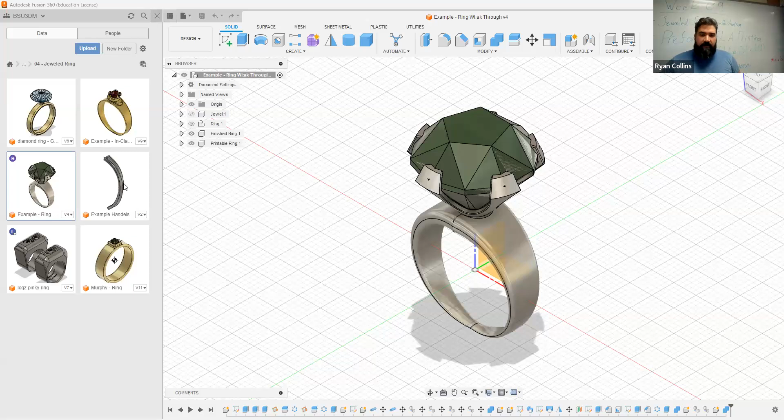All right, so let's figure out how to use an SLA printer, or our Formlabs printers. So first, let's hop over to Fusion, and I've got my model out. So got the finished ring, all of that stuff. And remember, while the requirement for the assignment was two separate objects, you do want to actually join these together, so it's a singular entity, a single object.

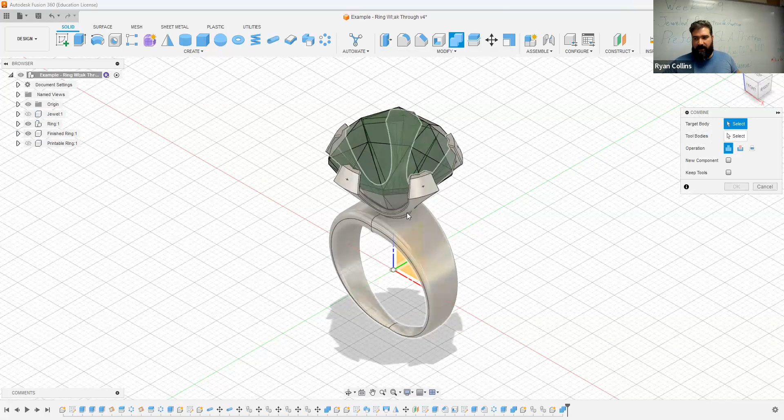So all that would mean is go to your combine tool, select one, select the other, complete that. I'm not going to do that right here because I have a different model already set. So I'm going to cancel that and just go over to the one that is already printed. So they're both sharing the same color because they're the same thing. I open the drop down, it's one solid thing. So there we go. Same deal.

You can go to export, but I prefer using 3D print. It seems to convert faster. Go to 3D print, disable utility, although you can actually use PreForm directly out of this. So you can actually go directly out. But just for the sake of consistency, I'm going to disable that, and we're going to print it just as is.

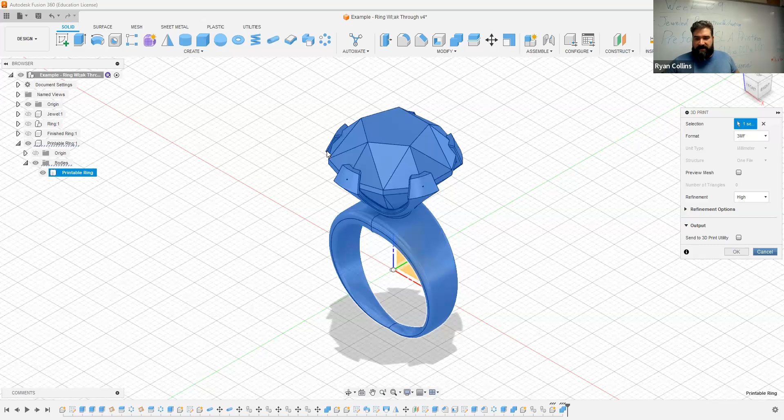So if you want, because this is a smaller thing, if you have higher detail, you might want to check the refinement and go higher. Go to high refinement if you would like. It's up to you. It's not really going to affect too much, but if you have a high detail thing, you want to make sure you're using high detail. So just save. Yep, that's fine. Saving on the computer, downloads. Okay, great. So now let me hop over to PreForm.

So this is the interface for Formlabs. It's very similar to most all of them. You can also use Cura, which is the Ultimaker Cura platform. It also supports Formlabs, but just know that there are some differences in the interface itself.

Now, first thing, well, let me bring the model in. Where is it? Drop in a model. Come on. No. Good God. There it is. So you just bring your model in, drag and drop, and you're good to go. Except, there we go.

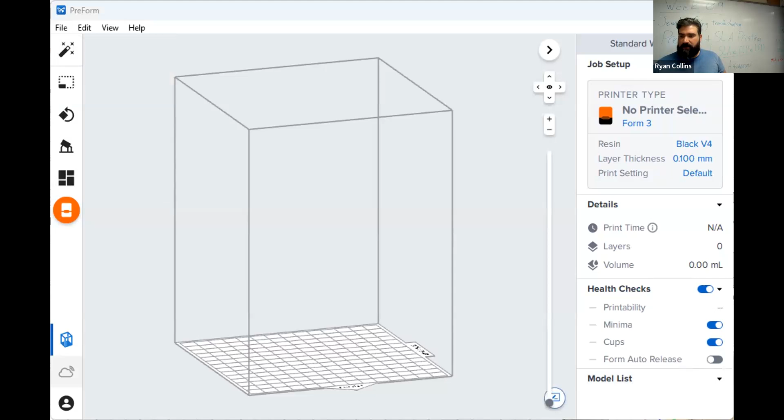Now, immediately you're going to get some errors like, oh, your model needs more support. Yeah, of course, because it's just floating right now in space. One of the things to remember is the printers are printing upside down. Unlike with the filament printers, where you're printing directly on the print platform, in this, you cannot print directly on the print platform. Even if your model is a flat model, you cannot print directly on the platform.

With the filament printers and such, your material is slightly flexible, all that sort of thing. With the resin, you're usually printing a rigid model. Now, yes, there are flexible resins. We'll get to that later, but either way, you cannot print directly on the platform. You have to have a supported model.

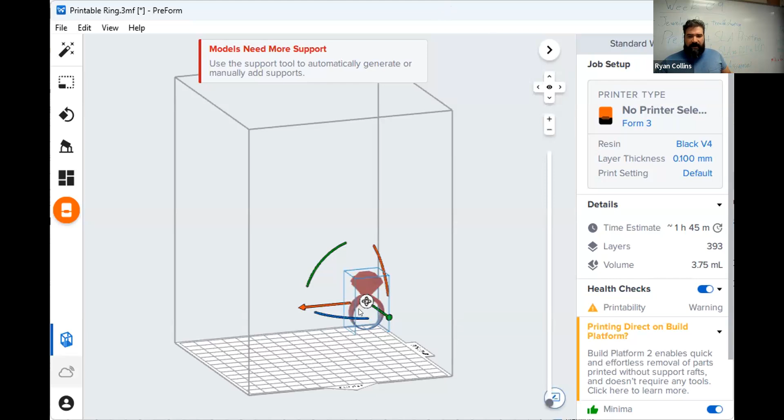So I've imported my object. It's 1:1 scale, and it's just going to automatically drop it in the corner there. That's fine. It doesn't need to be in the middle. A lot of other slicers plop your model right in the middle. This one, off in the corner.

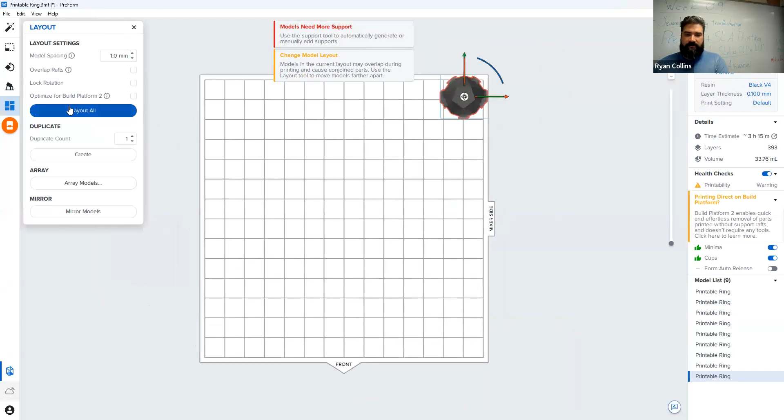Ultimately, it's that way so you can add more. Let's copy and paste a lot more. And then when I go to auto arrange, a whole bunch of them. So it'll automatically, just like anything else, fill up the platform. But I don't want all of those, so let's go ahead and chop them all out. There we go.

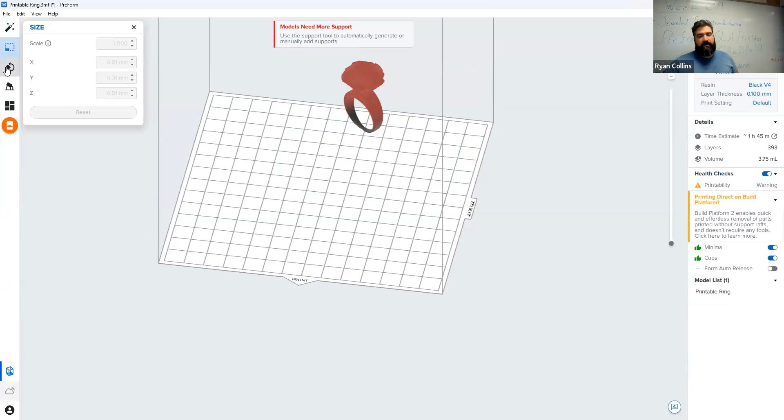Now, on your left is all your settings: scale, which is manually inputted, orientation, supports, layout, and then the orange button is your start print. These all have automatic options: auto orient, auto generate support. Honestly, until you are getting much more experience with this and have much more knowledge about exactly what you want, use the autofills. There's no reason not to.

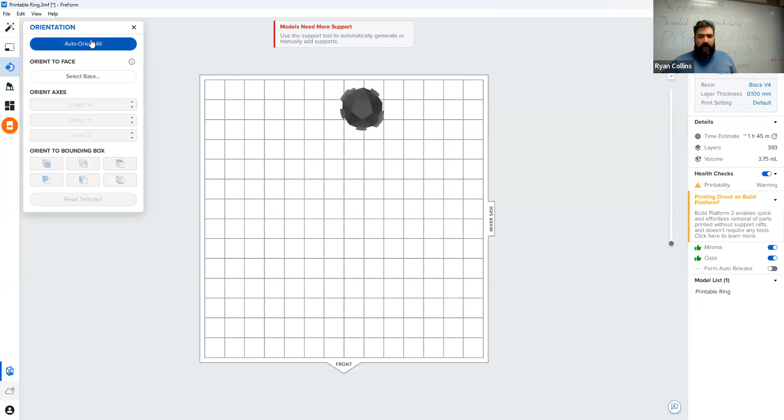So we'll go ahead and hit auto orient. Now, this is not always going to create the same consistency. So if I hit it again, it keeps changing. Mainly because this is currently incomplete, but it's going to be giving me some warnings. You see on the right-hand side and at the bottom, orange, it's building directly on the platform. That's a no-no.

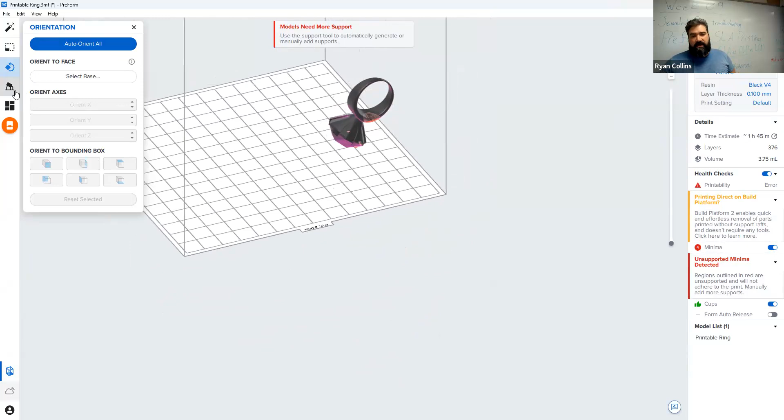The other one, minima, that is basically the same thing. It's an overhang. It can't print in free space. So what you need are supports. The next one down, this little crab-walking symbol, this is auto generate supports. Now, yes, you can edit them in. There's two different main versions. None is none, and you really don't want that. It's not good.

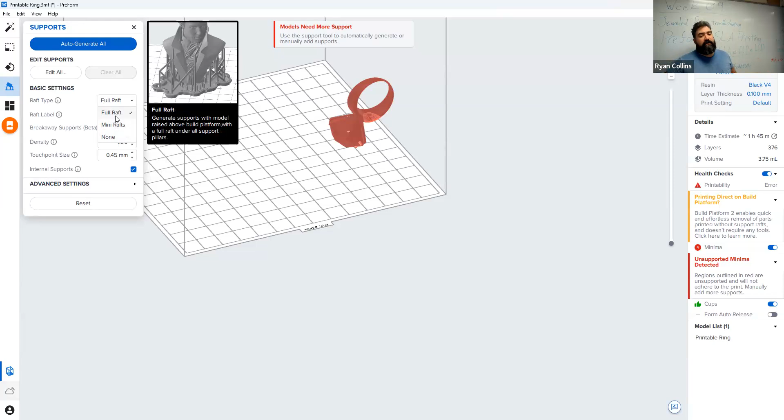I said you cannot print directly on the platform. You really shouldn't. You don't want to. It is technically possible. It's just not a great option because it'll bond to the platform so well. So you have two options here, rafts and mini rafts. As you can see, it creates this whole support platform, either a full raft or mini rafts where it's just where the supports touch down. So I'm going to use full raft and you'll see what happens. I hit auto generate. It's going to go ahead and move along. Now it's created this whole thing here.

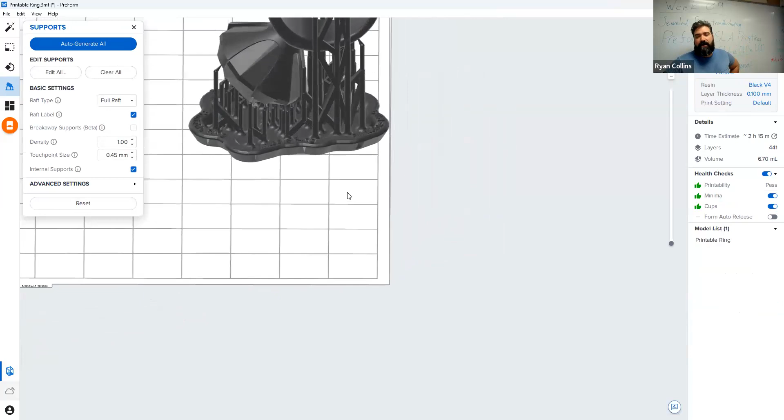Now, one of the main reasons you cannot print directly on the platform is because usually you're using an SLA printer, a resin printer, because you want something with a lot more detail and it's not a flat shape. You probably have a more organic shape. Now, you can see the auto-generated supports here are all this scaffolding-like things. These are the supports, but the neat thing is, unlike the filament printers where it's pretty much even through and through, these shrink as it gets closer to the object and create a minimal contact point. So you'll end up just being able to clip away that little bit.

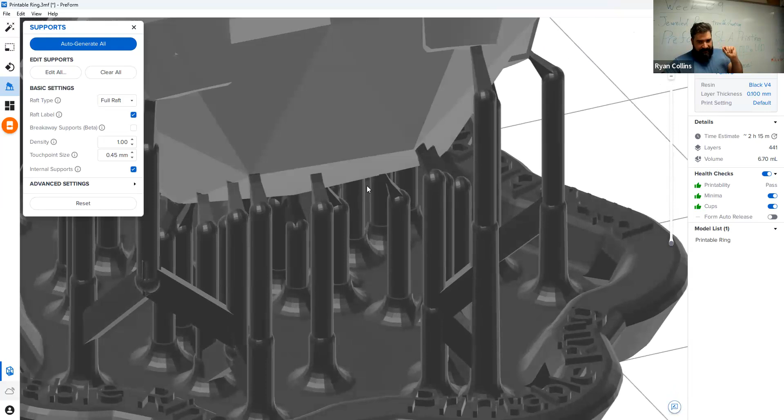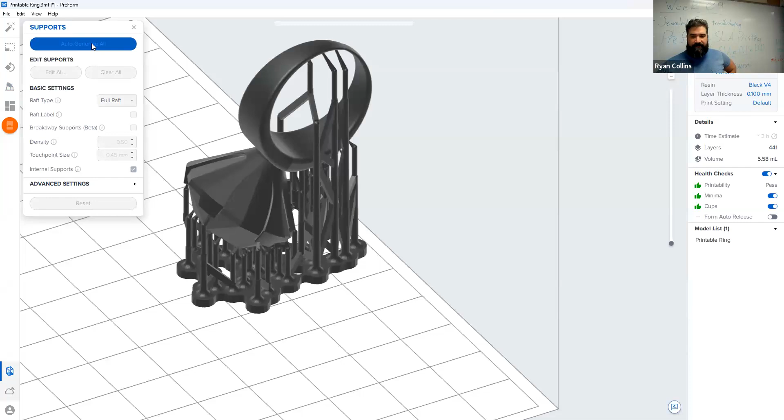But you can change this around. So right now it's on full raft. You can use one of the other options, mini rafts. Auto-generate. And it just shrinks the amount. Again, really this is just about making best use of your materials. In this case, I would go with full raft. It helps the most. But if you feel that there are just too many supports, you can dial that back. It's in quantities of 0 to 1. So if you want half of that, 0.5. Let's auto-generate with full raft and half of the support density. There you go. So it just reconfigures to what it feels is best.

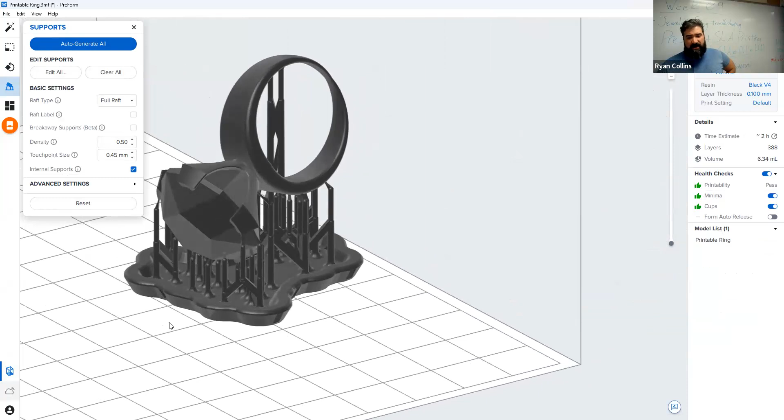Now, if I were to go back and auto-orient, it might reconfigure it entirely. Yep, see, it changed it around even more. So these are just going off of generated expectations, and it'll regenerate based on that. If you feel that it should be in a different orientation, try it out. The worst thing that'll happen is it won't print well. You're not going to damage anything. So, all right, we've got it there. Auto-orient or auto-layout if you like. It might just move it around back into the corner. All right, so technically, if you already had everything good to go, you could hit start print. But you can't yet because we've got to have something else.

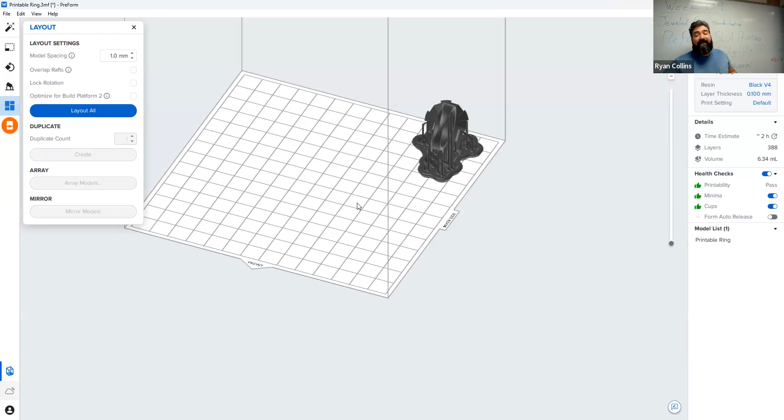On the right side, you have your options. Now, just like with the Prusa slicer and such, it'll give you estimates, 2 hours to print that. That's not bad. But because the laser does move quickly, even though it's tracing everything, multiples in the same layer don't add that much time. So now that I've got a good idea of what one would take, let's copy and paste a couple. Let's auto-orient those. And because I had a completed model, it keeps all the prints there. So adding 2 more only added 45 minutes to the print time.

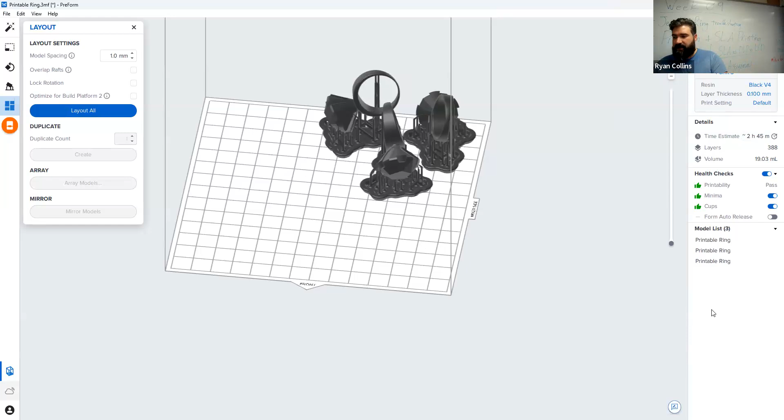So even though SLA printers are slower than LCD or DLP types, adding more objects doesn't really add a lot of time because yes, the laser has to trace everything, but it's a laser. It goes freaking fast. So it's up to you. If you want to try printing a bunch of them, or if you want to combine with other people, you could have multiple prints going on at the same time on the same platform. That's fine. But let's chop those last couple out because I just want one printing. All right, back to 2 hours.

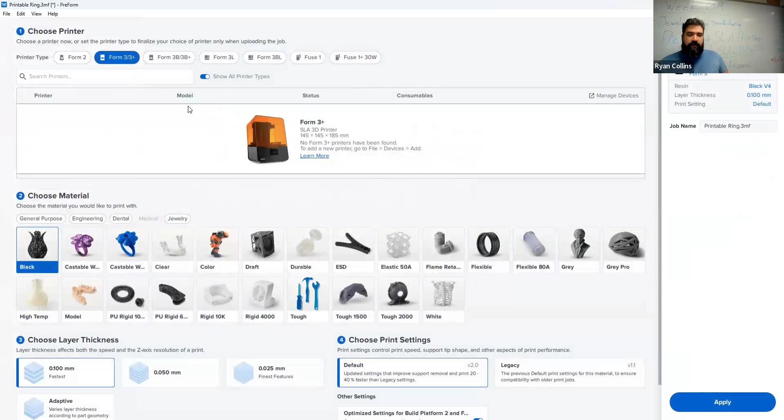Most important part, though, is making sure you have the correct printer. So the large selection here in the upper right-hand corner, printer type. It's currently saying no printer selected because I don't physically have a printer connected. You select this, it's going to bring up all your options. Now, what we have is a Form 2. If it's physically connected, it'll bring up, I think, an auto-generated name, because it's called like Fluffy Leopard or something like that.

Or somebody gave it a cool name, whatever. Down below, you can see the materials. Now, the resin cartridge it takes has a chip in it, so it auto detects what type of resin you have, just to make sure. But we're using the clear resin.

And then down at the bottom, you have your layer options, layer thickness. So just like the different settings when we were printing with the Prusa printers, same thing here. 0.1 fastest, so it's 0.1 millimeter per layer. Half of that, 0.05 millimeters, or a quarter of that, 0.025 millimeters.

If you're printing something like jewelry, definitely go with the absolute finest. Sorry, I couldn't see what the word was. Okay, so we're using a Form 2 clear resin. The computer will auto detect this. Just on this recording, it's not, because I don't have it physically connected.

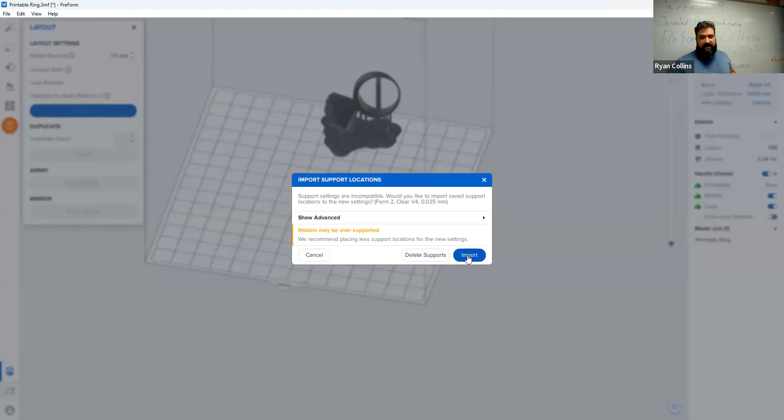Click OK. Now, because I changed the settings for the layer height, it changes the calculation. So all you do is just import these settings. All that's doing is importing the raft choice, the supports density, and orientation, stuff like that. Okay, so at maximum detail, that's now going to take 6 hours. So this is where SLA can get a little slow.

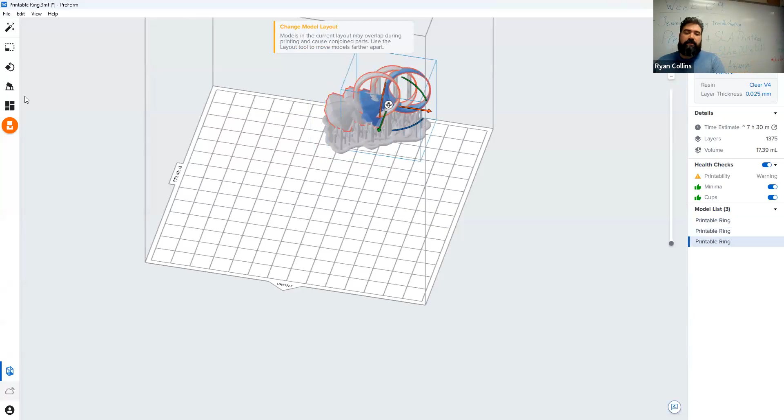But again, just for reference, let's copy and paste a couple and just see what happens. So it says it'll take 6 hours, 15 minutes. For 3 of them, 7 hours, 30 minutes. Now that is because we're using the highest quality setting. Honestly, for what you're doing, I would stick with the fastest, the 0.1 millimeters. I have found that is plenty well detailed.

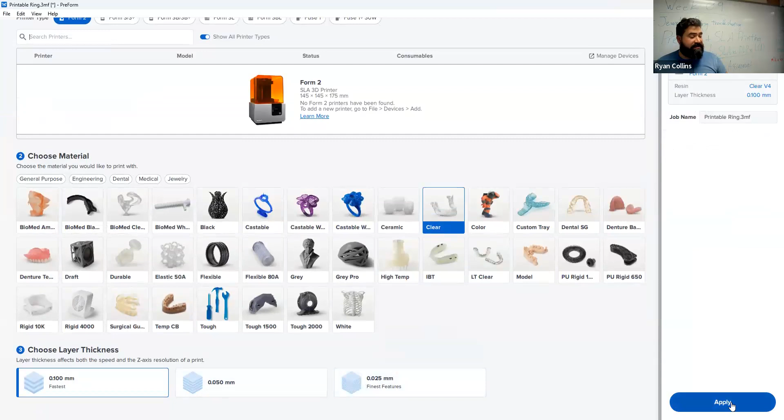For those of you in the room, I just printed up this tiny skull at that quality. I'll apply this and switch back. Import. While that's calculating, I'll stop share so you can see on the screen. This teeny little skull, whether or not it actually focuses, I can't tell very well. But that took about an hour and a half. So a little thing about the size of a marble. The filament printers would not be able to print this. It's too tiny.

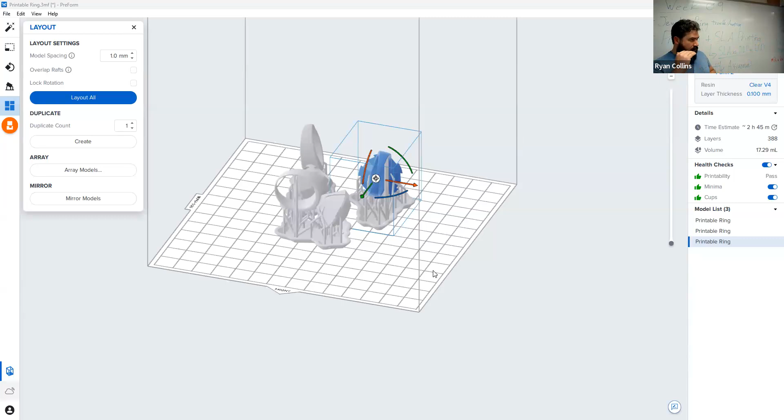Think of how wide a laser beam is; in this case it's real teeny, probably about the width of a hair. Whereas on the filament printers, you're dependent on the thickness of the nozzle itself. You can always play with the height settings, that's what I was just adjusting, the 0.1, 0.05, 0.025. With the filament printers, you have the settings of 0.3, 0.2, and 0.1, much bigger numbers.

So with this teeny little skull, the filament printers could not print that. It's much too tiny. But now that I've changed back to the faster settings, 3 of them, 2 hours, 45 minutes. So just know that you have some options. I have found that, at least for what we're printing, changing the detail doesn't really make that big of a difference in the quality of the print. Obviously, it adds a lot of time. So that's pretty much the rundown.

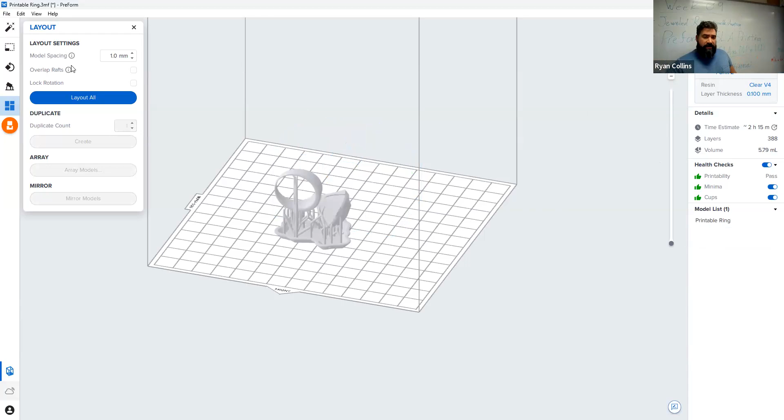Once you have all these set, you can hit go to print, and again this is physically not connected, but you hit add to queue. It will upload into the onboard memory of the Form printer. These printers do have an onboard memory, unlike our Prusa printers, where you have to use the SD card and leave it in.

You load it. It'll prompt you to print on the screen, and it's going to preheat a little bit. It's going to ask you to make sure the print bed is clean, same thing we've been doing, only it's the upside down print bed for the SLA printers. And you'll open the lid for the resin cartridge attached to the back of the printer, and then it'll prompt you, hit go, and you do. So that's pretty much the rundown.

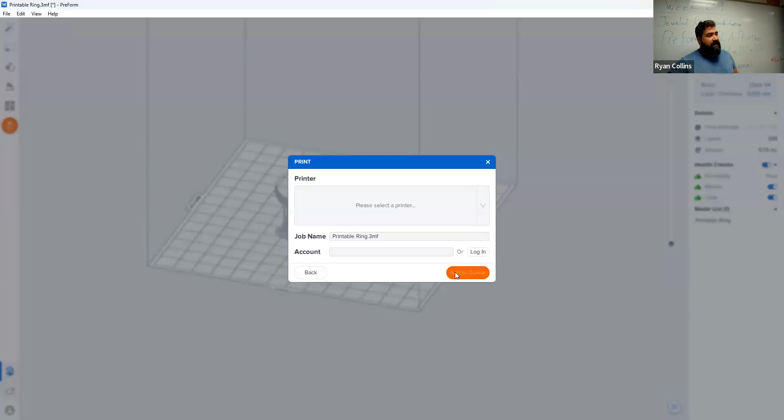I encourage you to use these, especially if you're printing your jewelry objects, because that's going to be the best possible option versus the filament printers. So try it out.